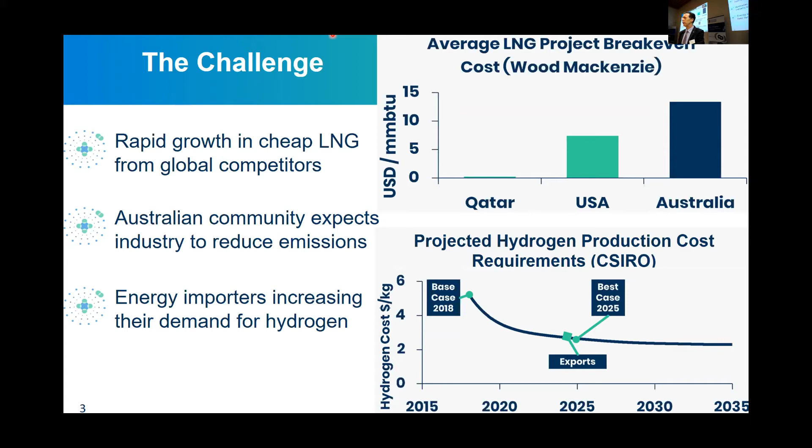Now, people often say to me, particularly if they're not chemical engineers, why would you combine LNG and hydrogen? What have they got to do with one another? Probably the audience here understands that a little better, but it's not actually about the technical similarities between these energy vectors. It's the workforce and the skills. There's no way a hydrogen export industry from Australia is not going to take advantage of the people who've driven the LNG industry here.

So transitioning that workforce is particularly important, standards and engineering practice, and also the business relationships. The shipping routes are important, the jetties, those sorts of things. So in fact, my argument is that the fact that we have an existing world-leading LNG industry gives us a natural advantage in the race to become a global hydrogen exporter.

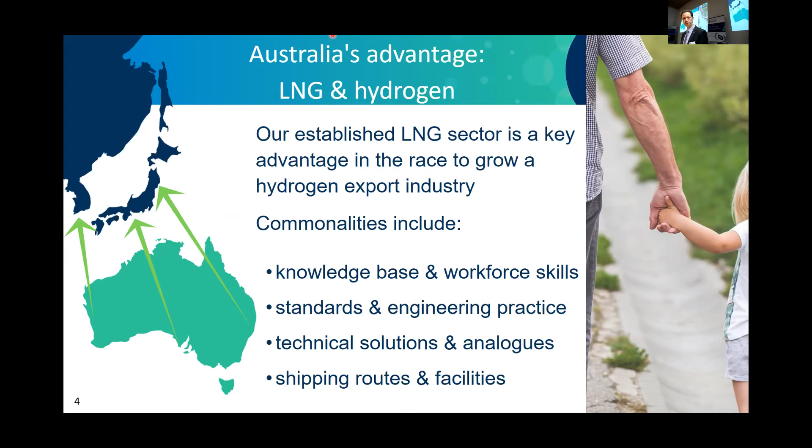But similarly, we want to look at the cheapest way of making hydrogen today, which is steam-methane reforming, coupling that with CCS. So none of these technologies is particularly innovative, and they've been demonstrated by themselves, but it's when you integrate them and figure out how you really drive the cost down so that integrated technology becomes competitive, that is a key challenge for us.

Once you've got the hydrogen, you've got to figure out how to get it to your customers overseas. And there are multiple options, and we are agnostic about the energy vector, whether it's ammonia, liquid hydrogen, or a liquid organic hydrogen carrier. We think that will very much depend on the market, who's buying it. So if you're doing base load power, then ammonia probably makes sense. You're just going to burn it.

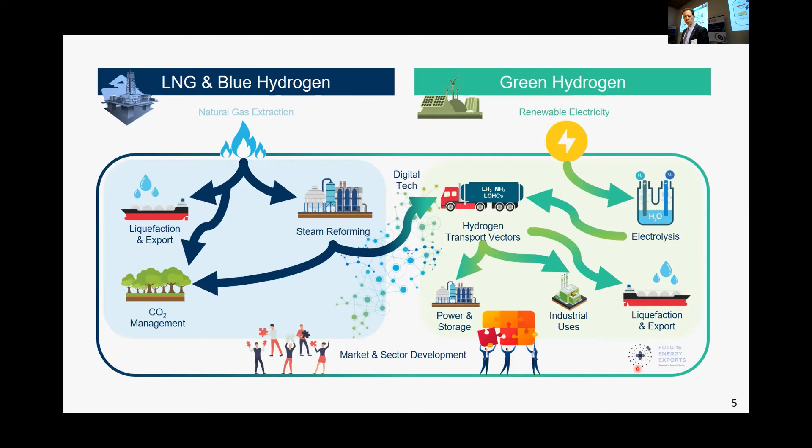Okay, so one of the things that's different about cooperative research centres is that they're actually independent from the university. So a bit different to the ARC centres and the chairs that have been run out of UWA before. The Future Energy Exports CRC is actually a not-for-profit company that is independent of the university, although UWA and other universities, as well as the industry partners, can be members of this not-for-profit.

So we have a board of experienced industry professionals, and we will be filling that out over the next few months to probably five. An executive team: myself, CEO; Mike Johns is the research director; and most of you know Jill Stajduhar, she's the Chief Operating Officer. The research directors are led by senior academics at the universities. So at Curtin, we have Professor Vishnu Pareek and Professor Craig Buckley leading the hydrogen program.

Program 1 is the LNG stream. Program 3 is the digital technology stream. That's led by Professor Stumptner at University of South Australia. And then Program 4, which is the sort of market and sector development, is co-led by academics at QUT. And we're fortunate to have Professor Ian Mackinnon, also at QUT, who is the strategic advisor on hydrogen to the Queensland government.

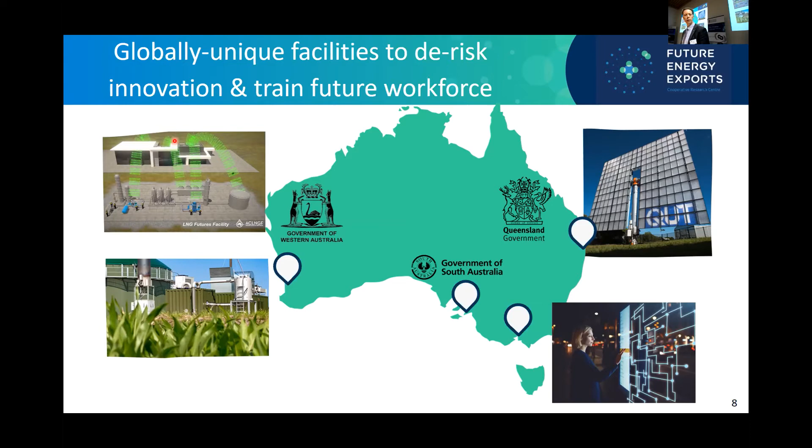And we hope to build the Futures facility, which I've talked about before, and I'll go into where we're at now because we're getting very close to the point of being able to take an FID. So I think of this as a foundation project for the CRC, the LNG Futures Facility. For those of you who haven't seen a video, I think it's worth a look. It's the Premier and Chevron CEO Mike Wirth at Shanghai last year at LNG 19, explaining why it's important. The cartoon video is shown here.

The original idea is you have a small scale LNG plant which is not there to make money or to make LNG, but rather to provide common user infrastructure to test out and demonstrate new technologies, whether they're sensors, mixed refrigerant compositions, new ways of recovering valuable compounds from the gas. We did a pre-FEED study in 2018, identified this location which the state government has leased to us for the next 10 years, which is right next to Compressor Station 10 on the Dampier to Bunbury pipeline.

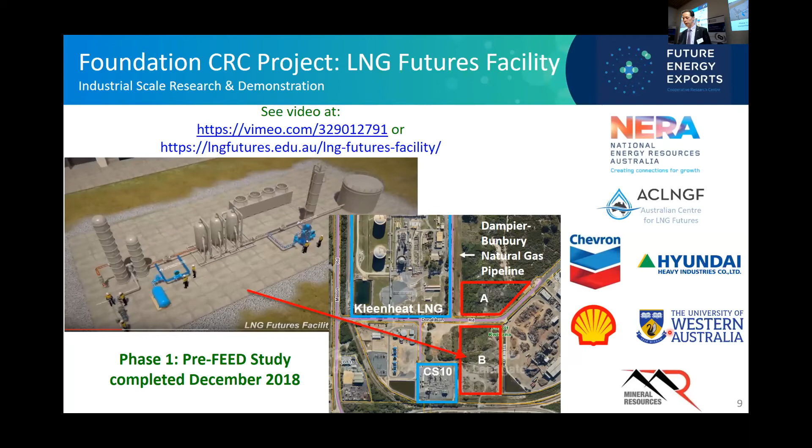And this study, as well as the FEED that we've done, has been funded by NERA, Chevron, Hyundai, Shell, and UWA, and Mineral Resources Energy has put in a lot of in-kind work and continues to do so. So last year and at the moment we've been doing the FEED, working with Clough to generate something like 197 documents, which although it's a small project by the scale of many that are in this state, it's been quite an interesting and excellent learning experience for myself.

I won't go through all of these items, but we've figured out exactly how the process units will be aligned, what they are, who is the vendor, how we're going to tie into them, what's the instrumentation that will allow us to get better data quality than can currently be obtained from existing plants.

And of course, the key concept is, you might say, well, we've got all these plants, why do we need this one? Those plants have a task and they're not to be mucked around with. You can't take and demonstrate a technology. This one will be turned on and off all the time and deliberately disrupted and operated in modes that you shouldn't operate it in from a strictly operational perspective, because you're trying to see if things work better in the way we think they might.

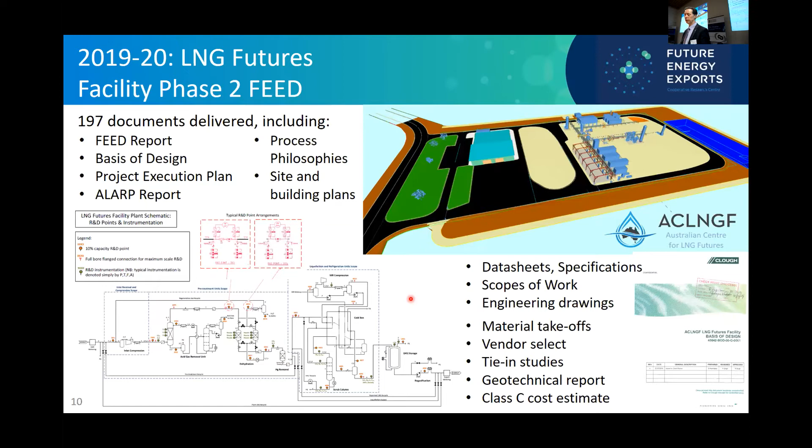This is sort of more on the way it's laid out. The LNG train will sit here. This covered area would be for where you would do much of the R&D plugging into that train at various stages. I'll talk about that more.

The key other feature that the state government is interested in is its unique training capability. Currently the best facility is ACEPT, which is air and water still, at up to 8 bar. Nothing with live hydrocarbons or high pressures. And as I said, the instrumentation here means we can do a lot better job of actually rigorously confirming whether our models are right or wrong.

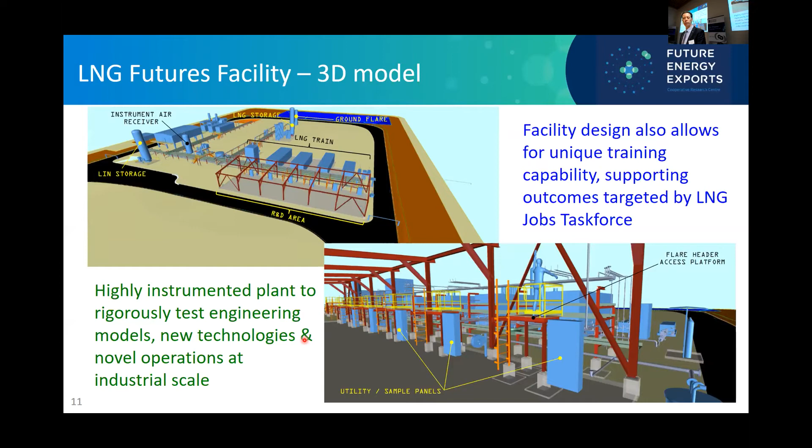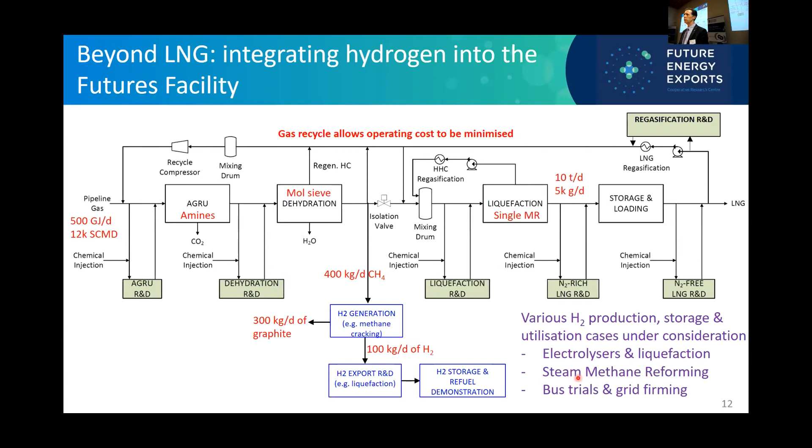And then once you've got the hydrogen, what do you do with it? Well, you could look at all these technologies in terms of making the various transport vectors, as well as perhaps providing fueling station demonstrations, certification for handling. The whole workforce needs to be trained, right, in how to work with hydrogen. So we're looking at several different options here, including electrolysers and liquefaction, steam methane reforming, as well as bus trials and grid firming services. So let me talk about them a little bit further.

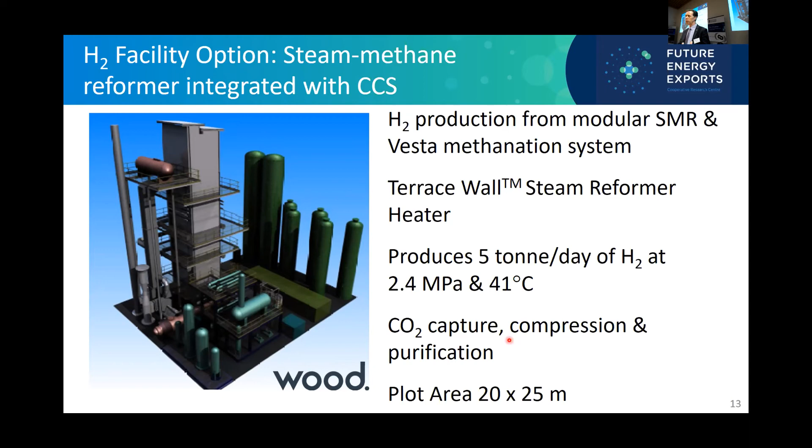So one of the options we're looking at is the integrated modular steam methane reforming system with CCS from Wood. It produces about 5 tons per day. So actually the main challenge with this system is that it will take all of the gas that's currently designed and turn it into hydrogen. There's nothing really smaller. That's one issue. But about 24 bar and 41 degrees C with the CCS. About $20 million for that unit is what has been indicated, an indicative cost, ex works, and again, it would easily fit into that space we have for tie-ins.

Another one we're looking at with our colleagues at ITM is electrolysers, in particular this 2 megawatt unit, which would represent one of the bigger hydrogen electrolysers that's actually been installed. We'd buy the electricity from Western Power, ideally from renewable generation in Perth, and possibly at a cheap price, and then be able to sell the electricity back when the renewables aren't online, so not only grid firming services, but that sort of arbitrage, if you like. And this would generate something like 0.8 tonnes per day of hydrogen.

So it's certainly easily handled and very pure, high purity. So, good for fuel cell studies, bus trials. We'd look to sell the hydrogen, perhaps to support a hydrogen bus trial in Western Australia. And again, effectively, these are very compact units and would fit easily on our site.

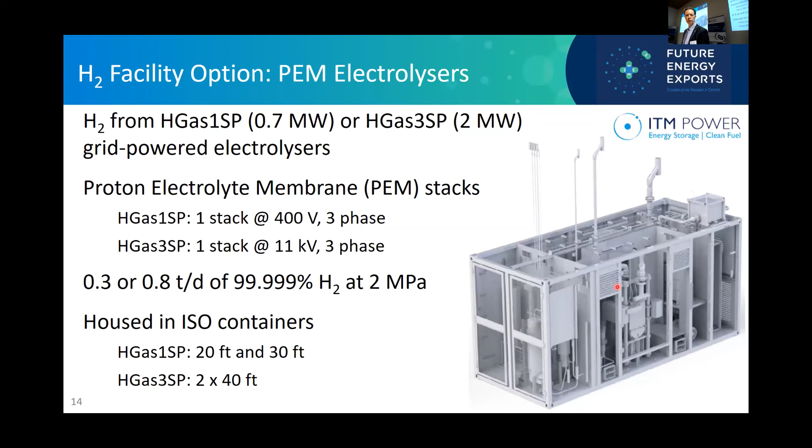So that certainly would allow us to then do a lot of research into the hydrogen liquefaction, and particularly improve refrigeration cycles. How do we drive the energy cost down in the way that's been done over many years in the LNG area, mixed refrigerants, other opportunities.

Of course, one of the scientific challenges is this ortho-hydrogen to para-hydrogen conversion. So for those of you who don't know, hydrogen is actually a mixture that exists with 2 compounds that are quantum mechanically different. And it's pretty cool that at room temperature and above, it's 75% what we call ortho. But at low temperatures where you make liquid hydrogen, it's almost entirely pure para-hydrogen.

And what's a problem is it's actually quite difficult to get the molecules to flip from one state to the other. The energy associated with that is like 7 times the energy to boil off liquid hydrogen. So if you don't do it, or if you do it too quickly and they don't properly convert, then all your liquid hydrogen boils off.

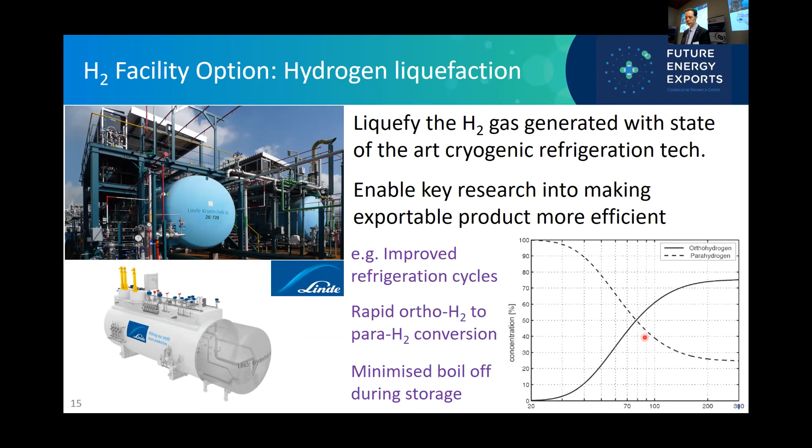So it turns out in these liquefiers, they have catalysts embedded throughout the system to do that flipping. And that energy conversion challenge is certainly one where we're looking to minimize boil off during storage. And speaking of boil off, again, just to show you some of the overlap between LNG and liquid hydrogen, we've been working at the ARC Centre for LNG Futures with Samsung Heavy Industries, who make the LNG carriers, on better ways to model LNG boil off in storage tanks.

So you might think, well, that sounds relatively simple, but what we understand from our colleagues at Samsung is that the vendors of the tanks that go into these ships provide them with charts which say, if your tank is this particular one, and here's a straight line correlation as a function of pressure, that's the boil off rate you're going to get. So if they change the pressure, they have to go to a completely new chart. It's certainly not coded in.

And why does this matter? Well, they have to design these ships with boil-off gas compressors on them. If those boil-off gas compressors are too small, you've got a problem. If they're too big, then you're wasting capital and not to mention the weight on the deck of the ship. So that's been their motivation.

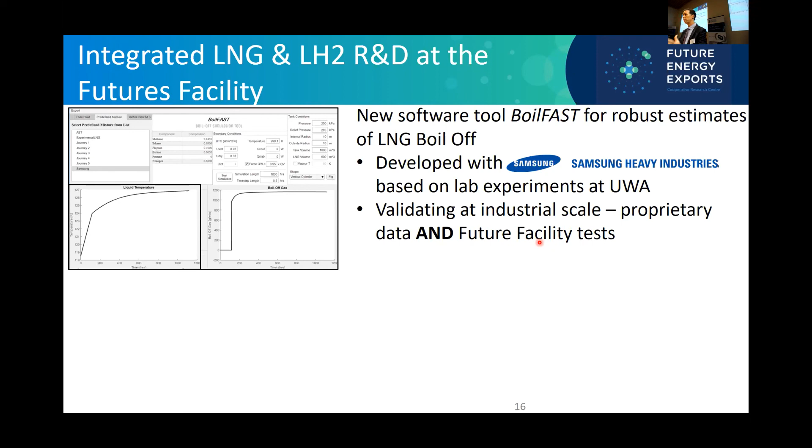And we've developed with a test facility here at UWA, plus some modeling, and then validated this model, a software package called BoilFAST, which allows LNG boil-off rates to be described much more accurately and working towards describing stratification. And of course, once the Futures facility is up and running, we'll be able to really optimize that model at a larger scale. But the basic equations are pretty similar for liquid hydrogen.

You've got to change the thermodynamic model and the like, but there are some data out there from NASA, for example, and no fitting, not allowed to adjust parameters, that's rule 1. You take our model and you swap the equations of state, and actually you do a pretty good job of matching that boil-off data that's available in the literature. But obviously, we need to go beyond this and ultimately there are smart things you can do in hydrogen storage to even further minimize this hydrogen boil off.

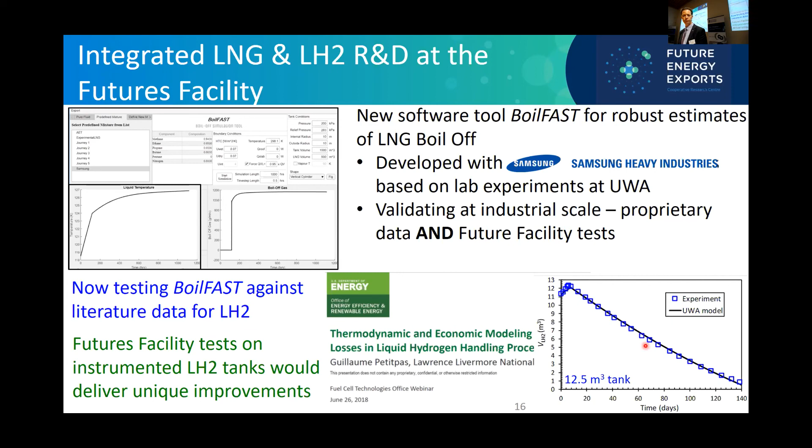But we'll be able to sell that gas back to the pipeline, probably at a similar rate to what we buy it at. We'll be able to generate hydrogen. Hydrogen sales are clearly worth something. Actually, the oxygen is also worth something, so you can sell that. Grid firming services mean we should be able to get the power essentially net free, because what we pay for power we can sell back in grid firming. And then we've got this $80 million of revenue from R&D and training.

And you might think that's a bit optimistic, but actually point one is the CRC would be a foundation customer. The CRC has $30 million. It's just that I can't spend it all in 1 year. I have to spend it over 10 years, but we'll be a foundation customer. So a bit like the agreements that LNG providers make over many years to at least do $30 million of R&D. And if you look at the R&D spend that just our group at UWA has done over the last 3 years, it tends to be about $3 million a year servicing the industry.

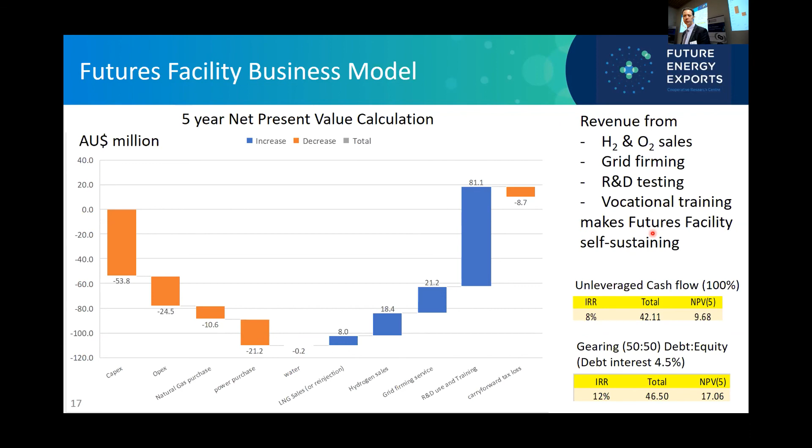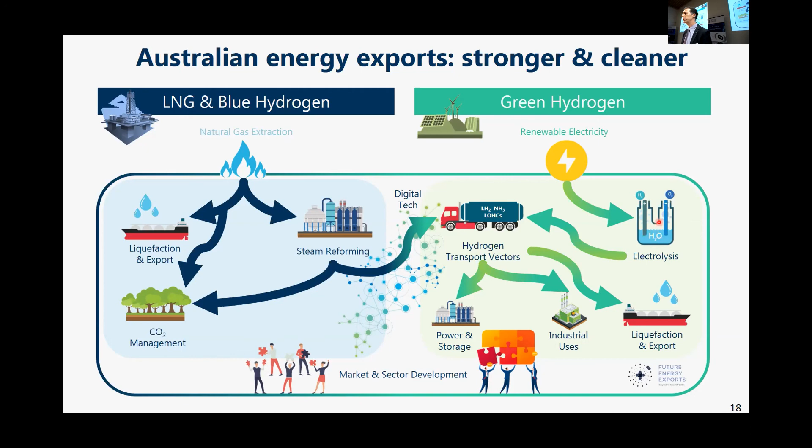So with that, hopefully I've explained to you what we're about and what we're trying to do, and that is to make Australian energy exports stronger and cleaner over the next decade.